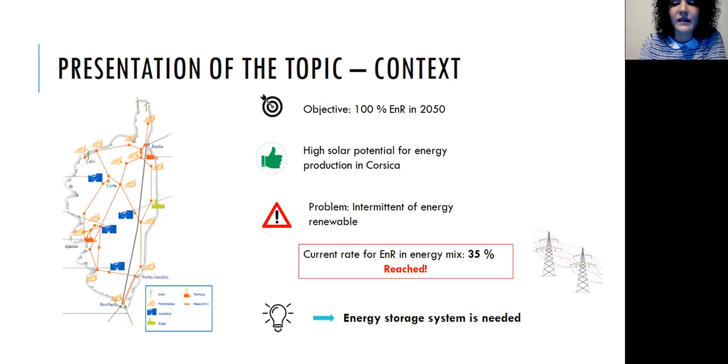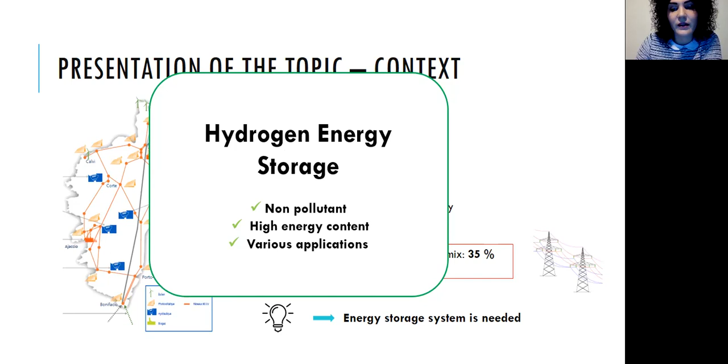Many ways are possible, but we have chosen hydrogen energy storage. Indeed, hydrogen has a high energy content, is non-pollutant, and can be used for many applications. Currently, only few pilot platforms have this kind of installation. The main objective is to improve the performance of the hydrogen chain in order to make it profitable and to promote this system. So, what is a hydrogen chain?

Hydrogen chain is composed of energy sources. In our case, we only consider renewable energy, but it is possible to use fossil resources if there is a process for carbon captation, as we can see here.

The surplus of energy is converted to hydrogen and oxygen in an electrolyzer. Hydrogen is then stored either in form of gas or in form of liquid, mostly in form of gas in high pressure tanks. Then hydrogen can be either transported for further application, or another way is to use hydrogen on site to regenerate power, like in the MYRTE platform.

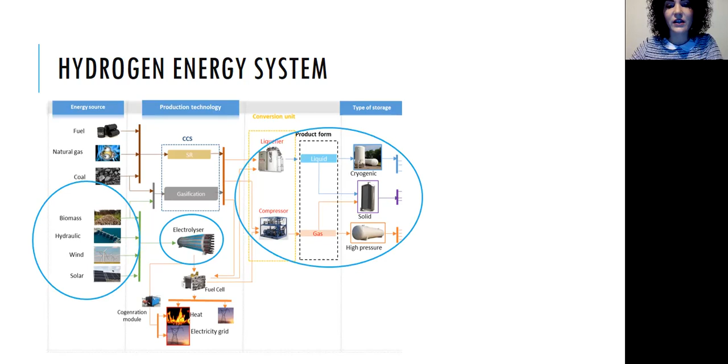So the hydrogen chain is very interesting for stationary application. We need a renewable energy source, and here the hydrogen chain is also composed of an electrolyzer and a storage system. Different technologies of electrolyzer are available, like alkaline electrolyzer, proton exchange membrane electrolyzer, and solid oxide electrolyzer.

When we need power, hydrogen is fed into a fuel cell where power is regenerated. Several technologies of fuel cell exist. Most used are alkaline fuel cell and proton exchange membrane fuel cell, but a lot of research is ongoing, especially on solid oxide fuel cell, which can be operated at high temperature. The others are phosphoric acid fuel cell, direct methanol fuel cell, and molten carbonate fuel cell.

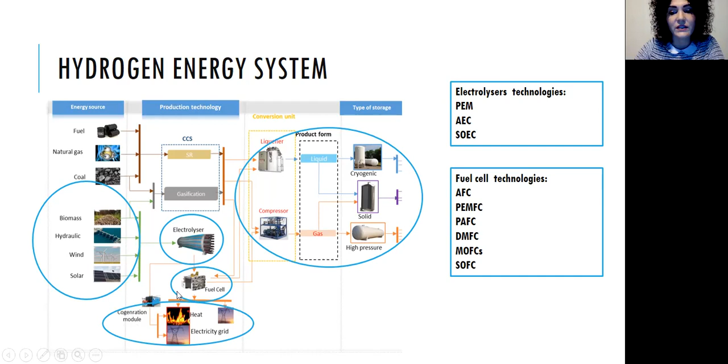Finally, power can be fed into the national or local grid. Another very interesting way is to use a cogeneration module in order to produce both heat and power. The heat recovery allows to significantly increase the global efficiency.

So, hydrogen can be used in many ways. Hydrogen can be sold to industries. Here, hydrogen is then used as raw material in many industrial sectors, for example, for ammoniac production, glasses production, or for the production of textile fibers. It is called power to feedstock.

In the industry, hydrogen can also be used as fuel to power engines. Hydrogen can also be used as fuel for the mobility sector. It is the power to mobility. Hydrogen-powered buses and cars already exist.

Another way is for the energy sector, of course. Either hydrogen is converted to power, as explained, which is power to power, or hydrogen can be injected into the national gas grid or used in a methanation unit to produce methane, which is also injected into the national gas grid. So this is power to heat or power to gas.

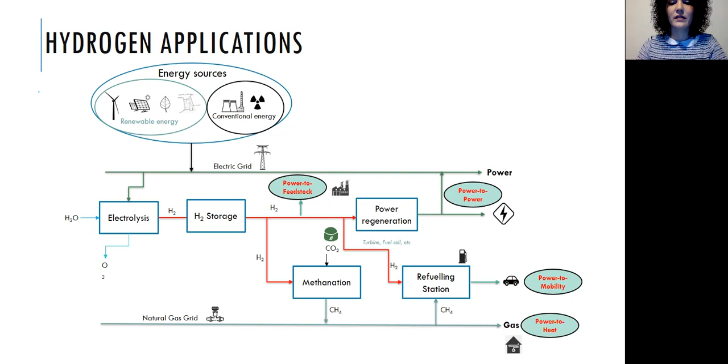Hydrogen offers a wide range of applications. But currently, hydrogen energy storage systems are still unprofitable. The cost of hydrogen production is still high because the different components are expensive and need some improvement in terms of reliability and efficiency. Currently, the efficiency of a hydrogen energy storage system is around 40%.

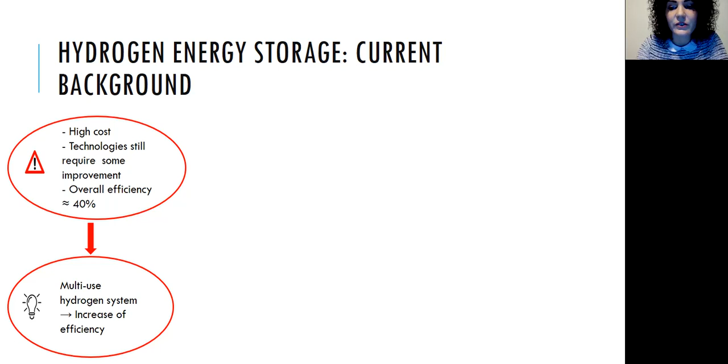However, to increase the overall efficiency and to reduce the cost of hydrogen, one solution is to use hydrogen in different ways. For example, one part of hydrogen production for mobility, one for power generation, or another part for the national gas grids. When the uses of hydrogen are various, the overall efficiency is higher.

I would like to recover the heat produced throughout the system in order to operate the MYRTE platform in cogeneration mode. As we can see, heat is produced in the electrolyzer and in the fuel cell. Currently, the heat is wasted, but I would like to use it for hot water production, for example.

And cogeneration increases significantly the efficiency, so the efficiency is reached over 85%.

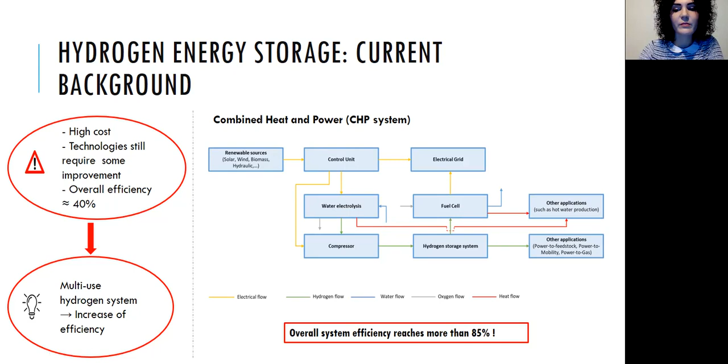In the hydrogen energy system, there are different natures of energy flow: electrical flow, hydrogen flow, and heat flow. It is not easy to compare different natures of energy, and it is difficult to determine which operating mode of the platform is more efficient. So how can energy flows be best and optimally managed?

To manage this energy flow, I decided to use a new approach: exergetic analysis. The first step of my work is to consolidate the existing static and dynamic characterization of each platform subsystem, first through an energy analysis and then through an exergy analysis. Energy refers to the quantity of energy, while exergy refers to the quality. Exergy can be defined as the useful potential of a certain amount of energy at a specific stage.

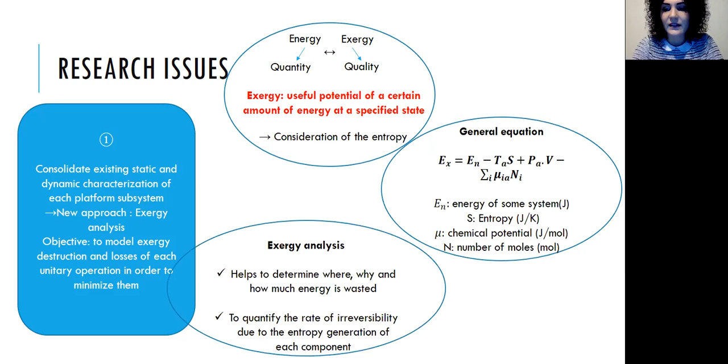Contrary to energy analysis, in exergy analysis we take into account the irreversibility of reaction. We consider the first and second law of thermodynamics. The objective is to model exergy destruction and losses of each unitary operation in order to minimize them. Here is the general equation of exergy. Exergy analysis allows us to identify where, why, and how much energy is wasted, and to quantify the rate of irreversibility due to the entropy generation of each component.

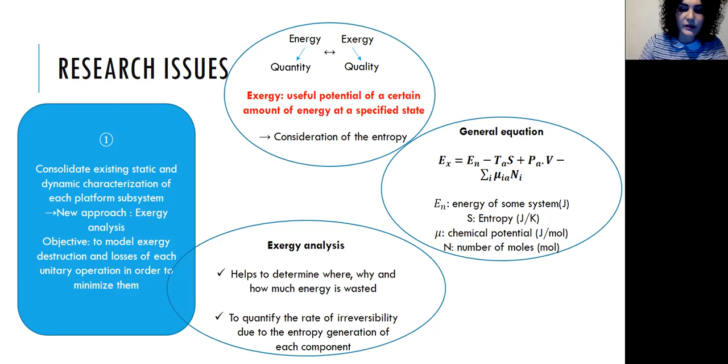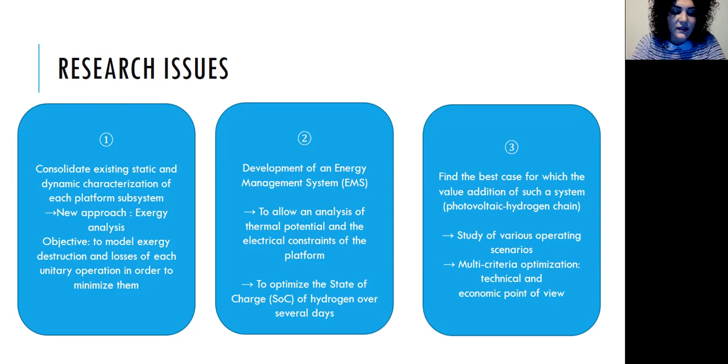The second step is to develop an energy management system to manage the entire platform and to allow an analysis of thermal potential and of the electrical constraint of the platform. This energy management system should be able to optimize the state of charge of hydrogen over several days. The last step is to find the best case for the value addition of such a system. It consists of studying various operating scenarios and determining the best under technical and economic criteria.

So I'm going to introduce you to the MYRTE platform. MYRTE is the result of a partnership between Areva and the University of Corsica. MYRTE is composed of a PV photovoltaic area of 560 kilowatts and 2,240 units.

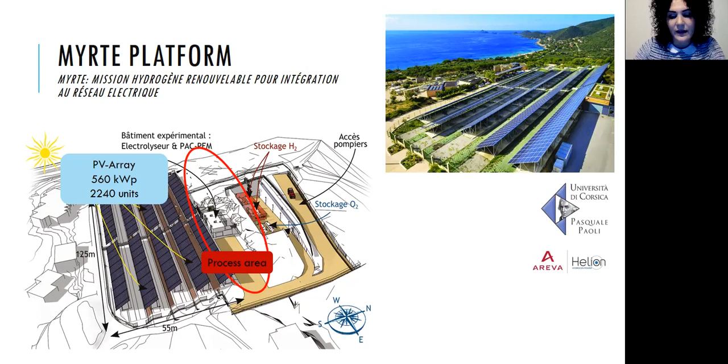Behind them, we have the process area, including electrolyzer and fuel cell. And then we find the storage area. Hydrogen and oxygen are stored under 35 bars. The storage capacity of hydrogen is 2,000 cubic meters.

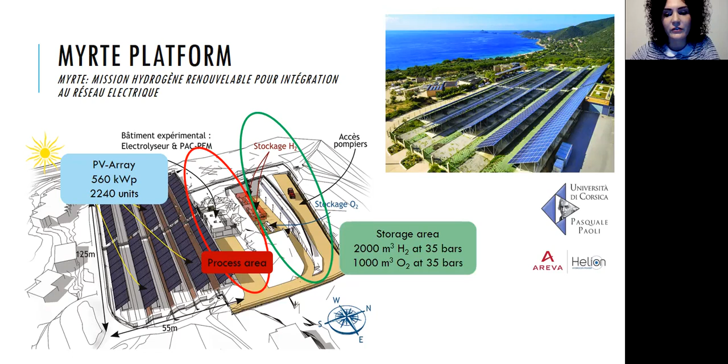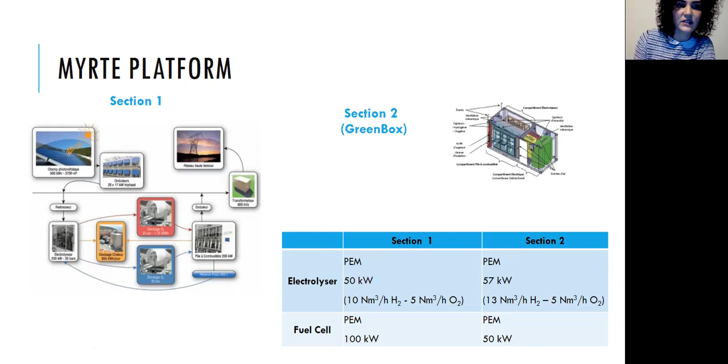The process area is divided into two sections. The older is section 1, which is composed of a 50 kilowatt electrolyzer producing 10 normal cubic meters per hour, and a 100 kilowatt fuel cell. Section 2 is called the green box and is composed of a 57 kilowatt electrolyzer and 50 kilowatt fuel cell. All components are in a container, allowing the green box to be transported and installed easily and quickly everywhere. Both electrolyzers use PEM, proton exchange membrane technology, as does the fuel cell.

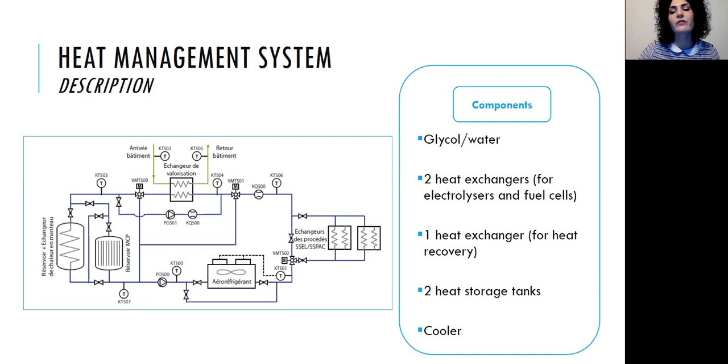In order to operate the platform in cogeneration, the heat management system is essential. Its main goal is to cool the process, namely the electrolyzer and fuel cell. It is composed of two heat exchangers for cooling the electrolyzer and fuel cell, in which circulates a glycol water mixture, and a dry cooling system. It is also composed of one heat exchanger for heat recovery and two heat storage tanks.

Seven operating modes are possible. The first mode is when the entire system is off. Mode 1 allows only to cool the process. Mode 2 allows to cool the process and to recover the heat, which in this case is immediately used. In mode 3, heat recovery, the recovered heat is stored in order to be used later.

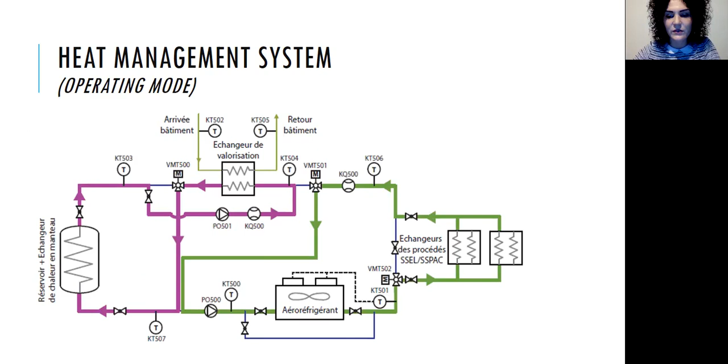Mode 4 consists of using the heat stored in the tank. Mode 4 and 1 is a combination of mode 1 and 4: at the same time, but independently, heat storage is used in the heat exchanger for recovery, while the feed of the process is cooling. The last mode is the purge. With this system, we can operate in different ways according to what is needed at a specific time.

Currently, the energy analysis of the platform is almost completed. To summarize easily and quickly with periodic equations, modeling and simulation of the electrolyzer depend on 5 parameters: the charge transfer coefficient at the anode, the current density, the activation energy required to transport electrons to the anode, the protonic conductivity of the membrane, and the activation energy to transport the protons in the membrane. These parameters are obtained from the experimental polarization curves.

Fuel cell energy balance is similar, but we focus on the cathode. The thermal model of the fuel cell depends on the heat capacity of the control volume and the thermal resistance, and the storage system depends on the number of moles, the pressure, the temperature, and the volume.

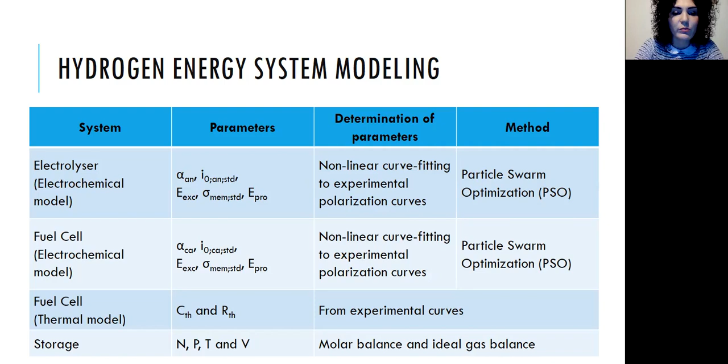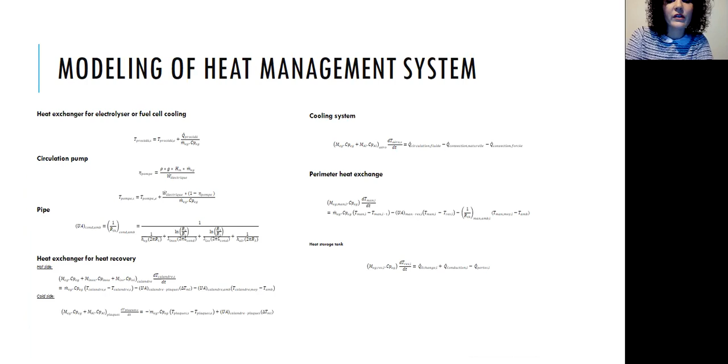Each component of the heat management system has also been modeled. Here are the equations. All models of each component have been tested under several conditions. All mathematical models simulate the equipment properly. The platform model is validated.

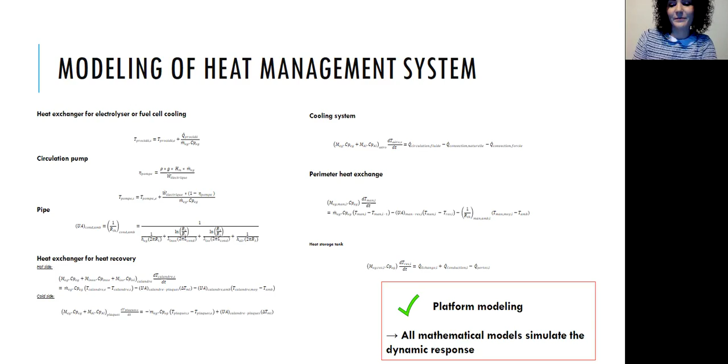However, there is substantial work to be done. From energy analysis, the exergy analysis will be quickly started. The higher heating value of hydrogen, which is usually used, will be replaced by the exergetic value. According to the result of the exergy analysis, we will determine the operational scenario which can be interesting for the MYRTE platform. Last but not least, the final step is the development of an energy management system.

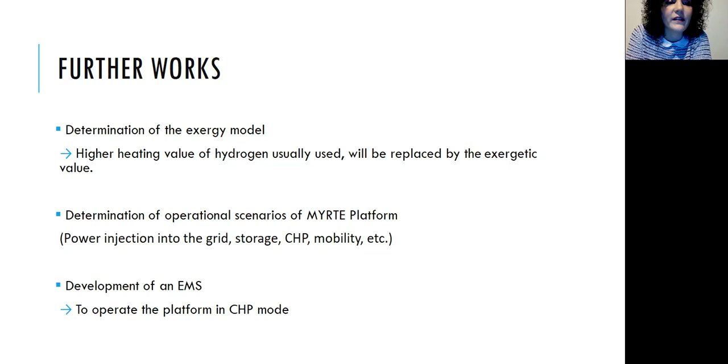So there is still a lot of work, but the first results are promising and could help to achieve the objectives of the energy transition. Thank you for listening.